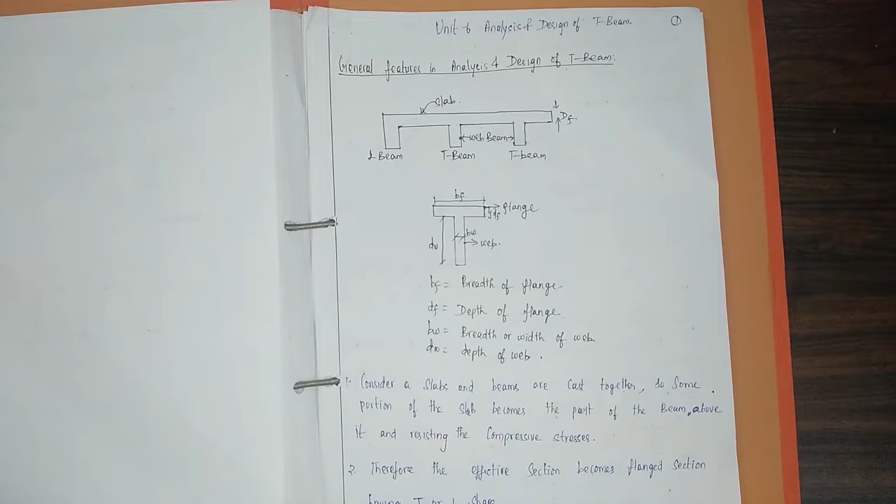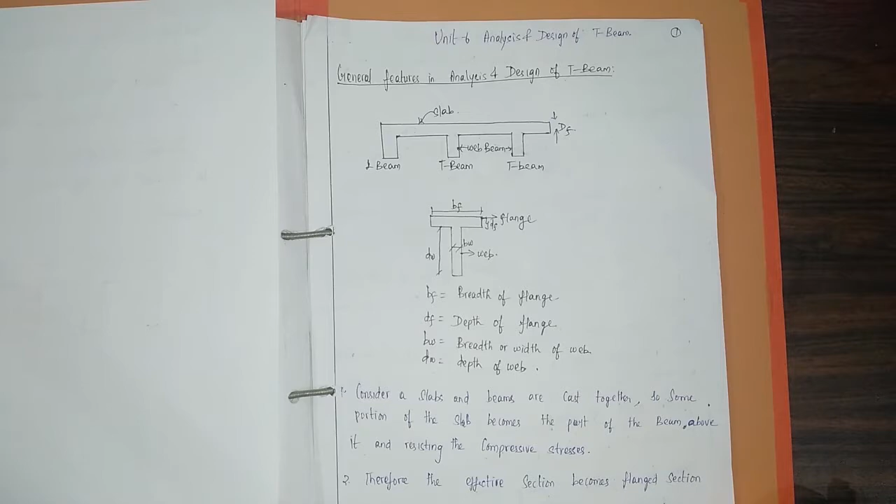In this class we are going to see a new unit about analysis and design of T-beam. This is your 6th unit in your SPT syllabus. According to your syllabus, you will have a brief introduction, then analysis part, then design part, and some simple problems to solve. Today we are going to see only the introduction part. In this lecture we cover the introduction, and in the next lecture I will teach you the analysis and design.

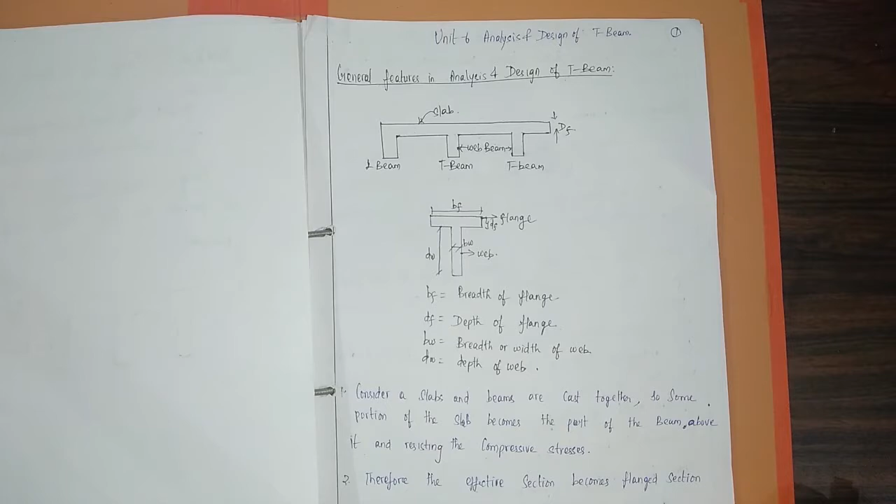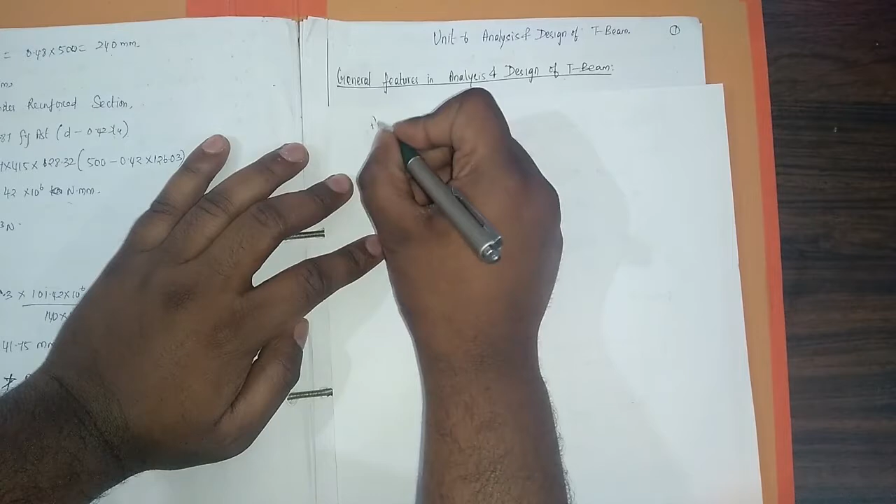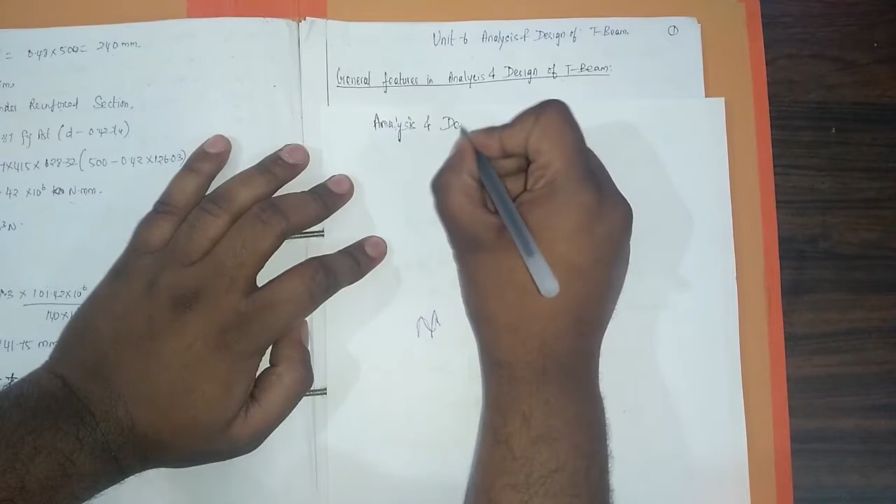So I'm going to divide this unit into two parts, so you will have a better understanding. First, what is the unit name? Analysis and design of T-beam.

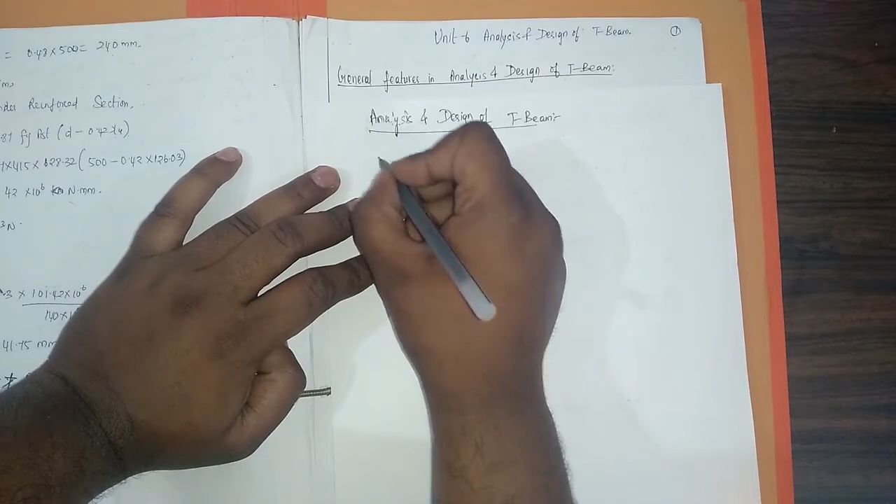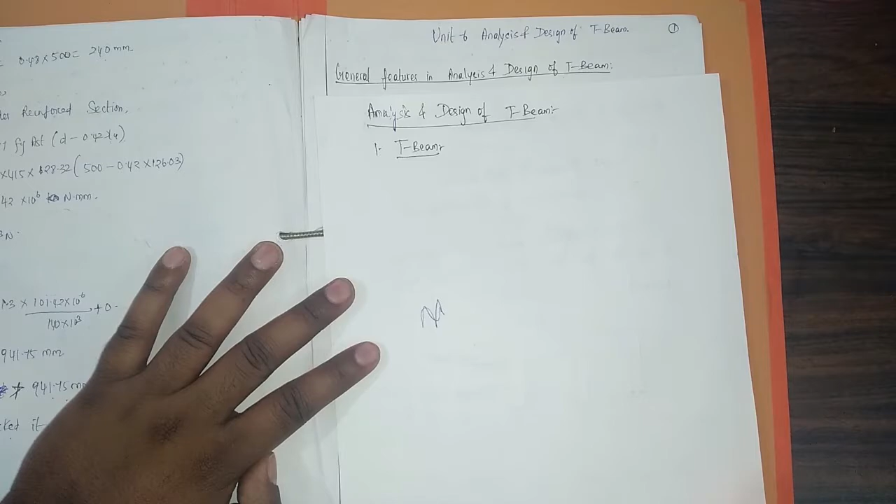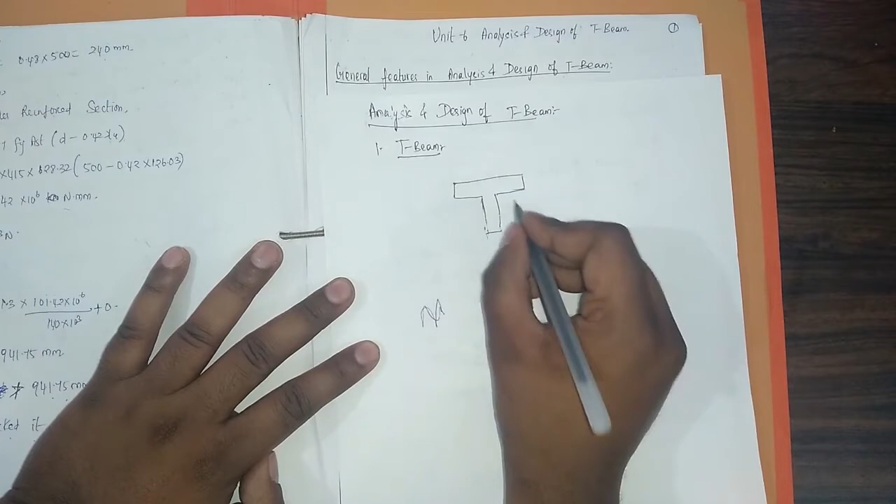First, what is T-beam? How is that beam called as T-beam? You must understand this. Due to its cross section being in the shape of T, we call it T-beam. For example, this is the T-beam. Due to its cross section being in T shape, we call it T-beam. Also, the T-beam is nothing but the beam which is cast together with the slab.

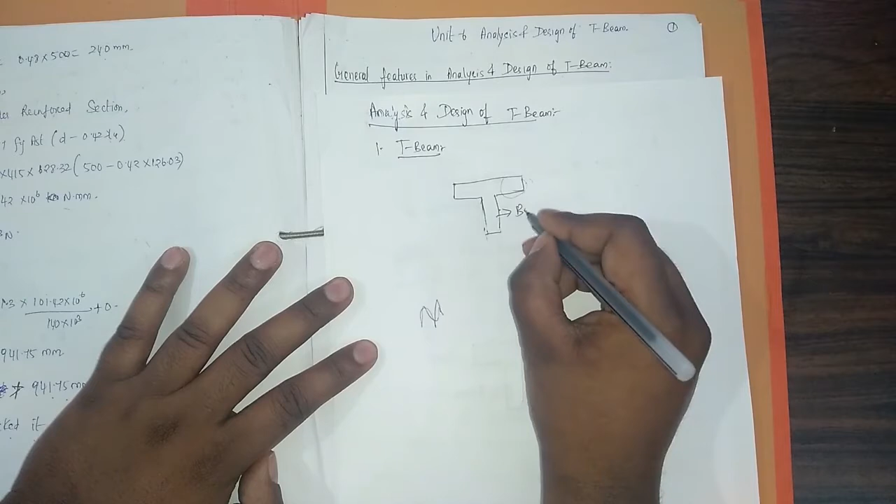In normal construction, if you see the slab casting, the roof slab casting, you can note that the slab alone is not cast. They cast it along with the beam. The beam and slab are casted together. So this is beam and this is slab, casted together, and they form a shape.

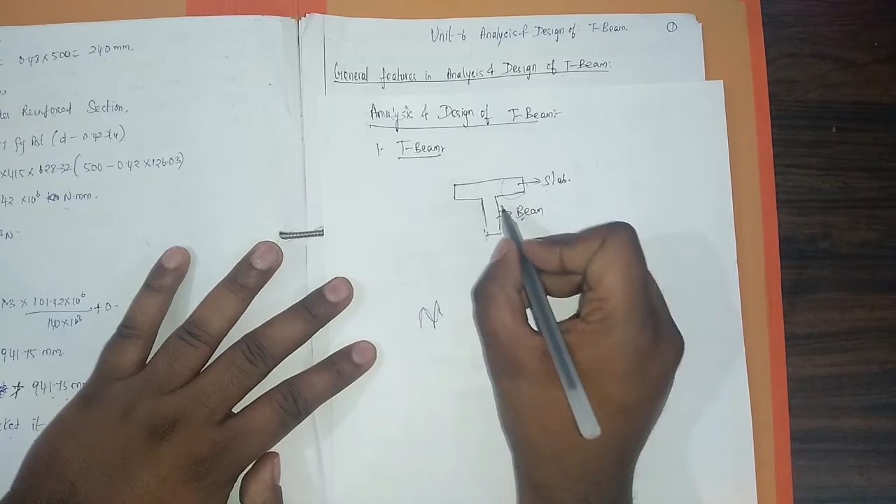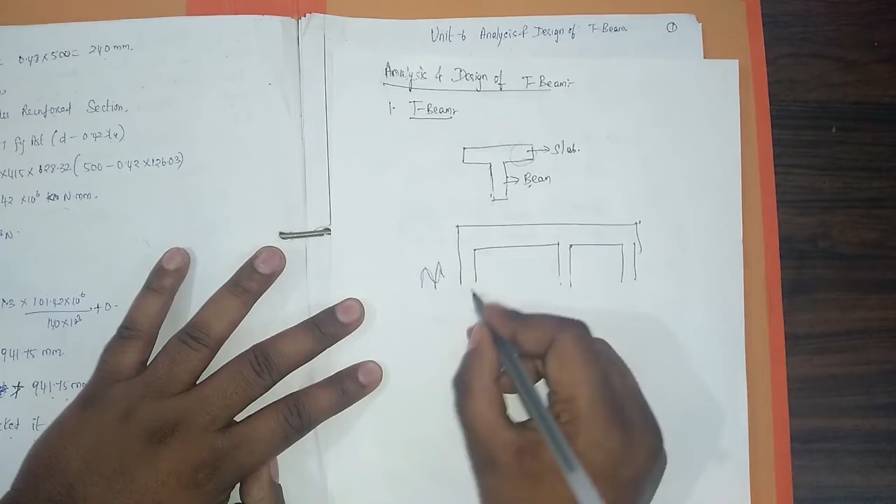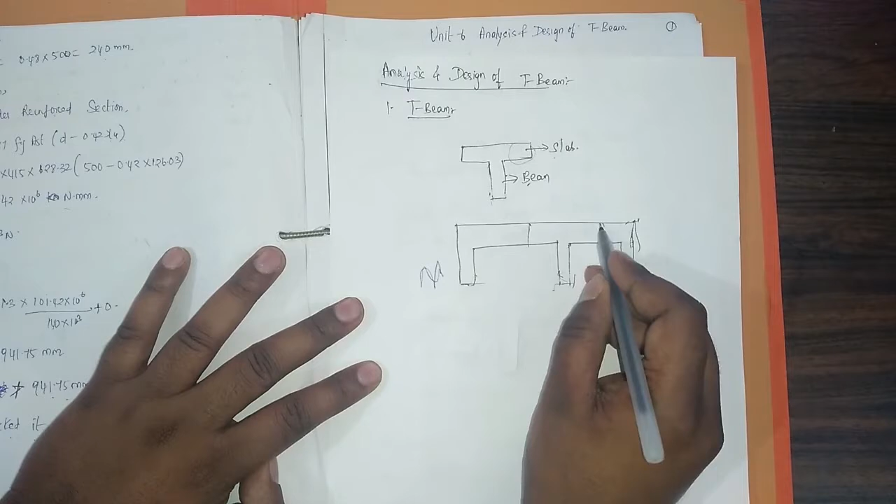For example, I am drawing another diagram. This is slab and beam. See, in this intermediate beam, this beam has slab on both sides.

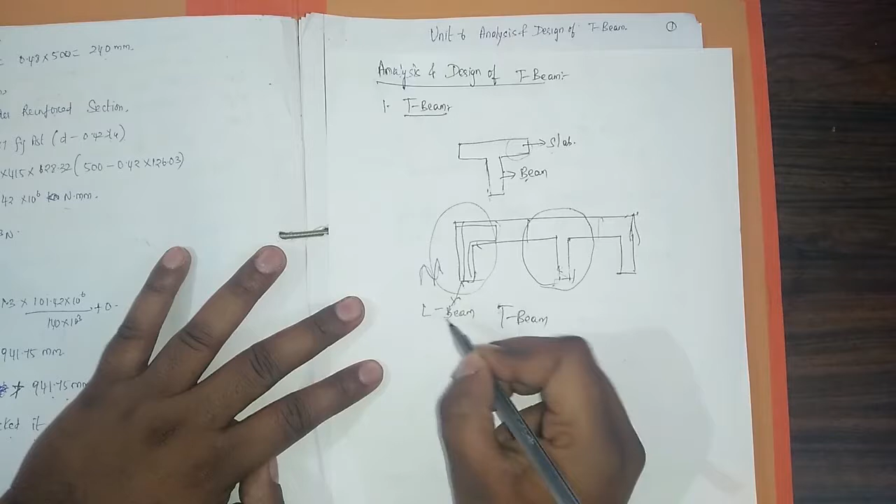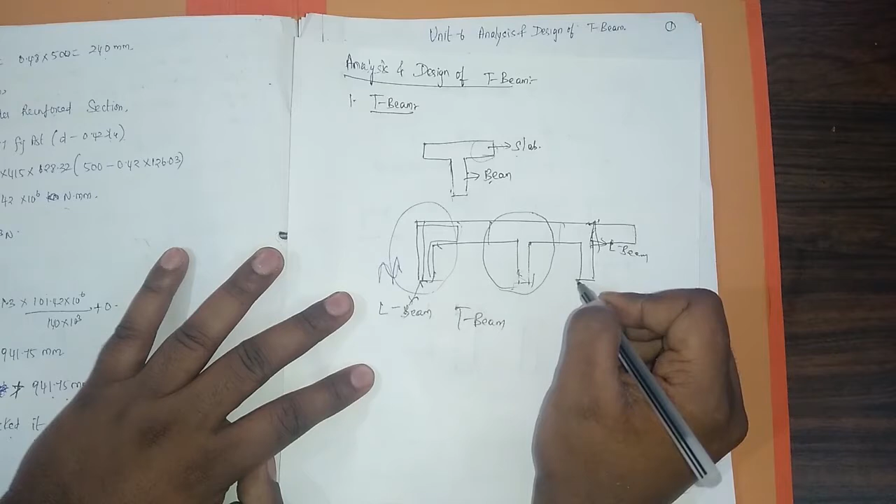So this beam is considered as T-beam. But if you see the left hand side, it doesn't have slab on both sides, it has only one side slab. So this shape is an L shape, so this beam is called L beam, and this beam is also called L beam. Suppose if the slab extends like this, then this beam is also called T-beam. You understand the concept?

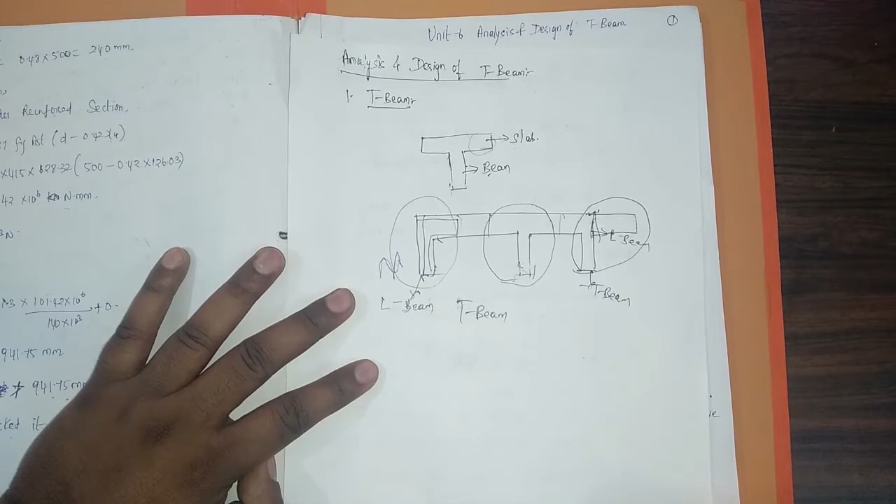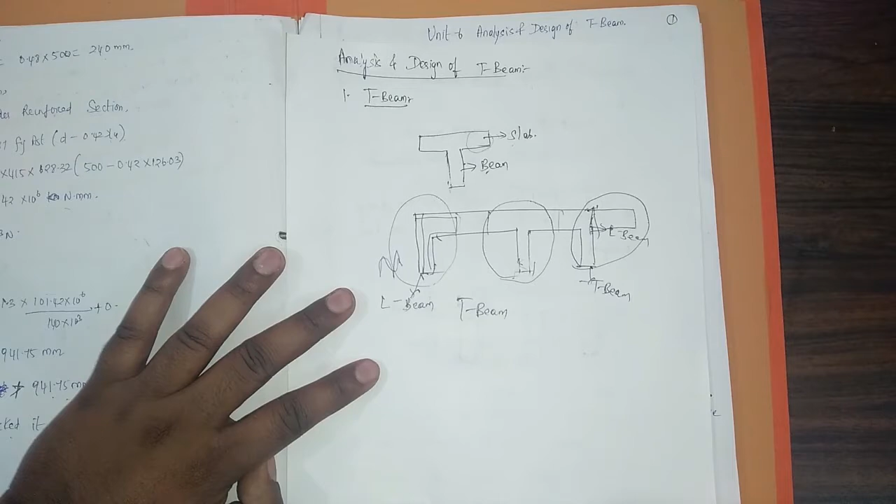So the T-beam is a load bearing structure which can be casted in any material like reinforced concrete, timber, steel, or any other component. It's a load bearing structure whose cross section is in the shape of T. Also, the T-beam is casted with both slab and beam, so it is called T-beam. So now we understand the total concept of T-beam, right?

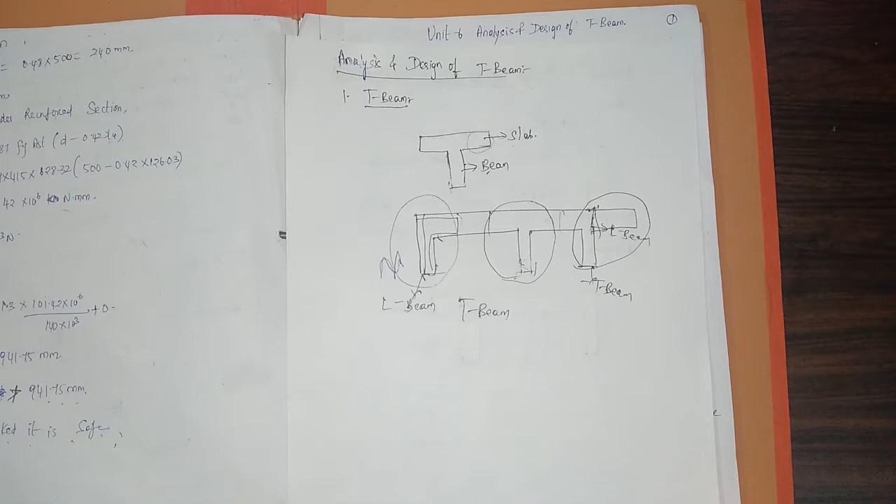Next, according to your unit, it is mentioned as analysis and design of T-beam, that is your subject, right? Design of structures, you have to design the structure. Design means if you are the engineer and you are going to place a structure in a particular area, you are going to design what is the height of the structure, what is the breadth of the structure, what is the thickness of the structure, that is the volume, the 3D.

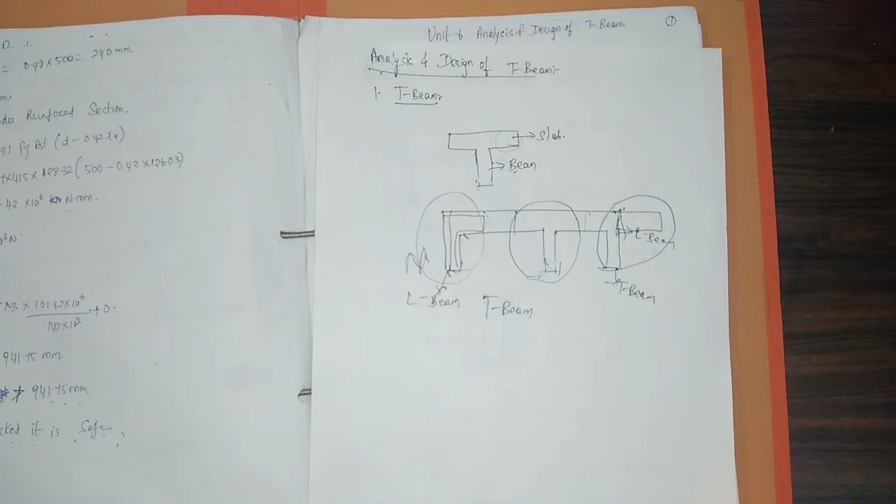That is only called as structure. So you are going to design what is the depth of the structure, how the structure should look, its architectural view, how the external view should be, how the internal view should be.

You are the engineer, you must want to design. The engineer must design each and every component of a building. Beam is a component, column is a component, slab is a component, stairs is a component, water tank, brick wall, door - everything is a component in a building. Combining all these components together is only a structure, a building.

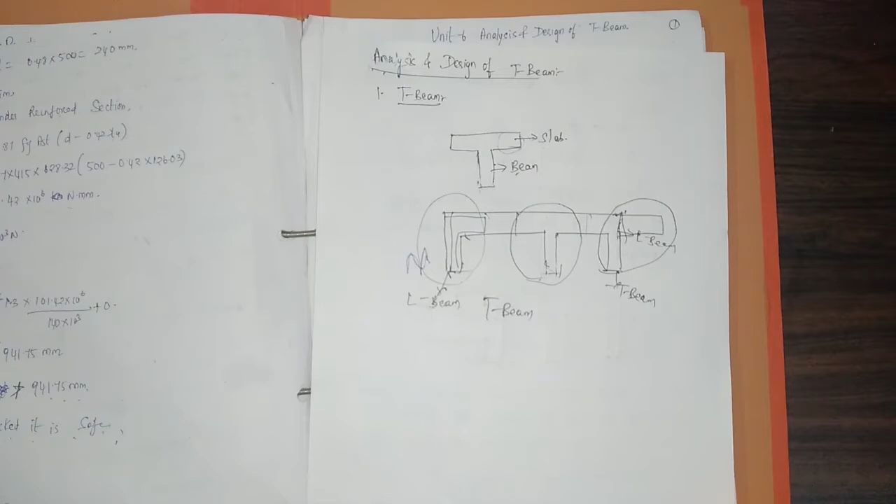Likewise, T-beam is also a component. So the work of a civil engineer is to design every part, to design every part.

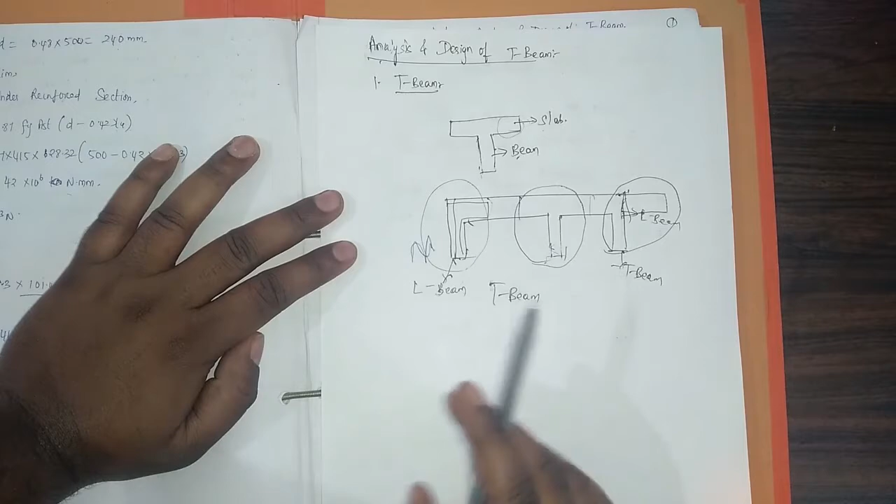So I will briefly explain what is analysis. Analysis is nothing but you are going to analyze how much load is going to act on a structure. What is that load that is going to act on a structure?

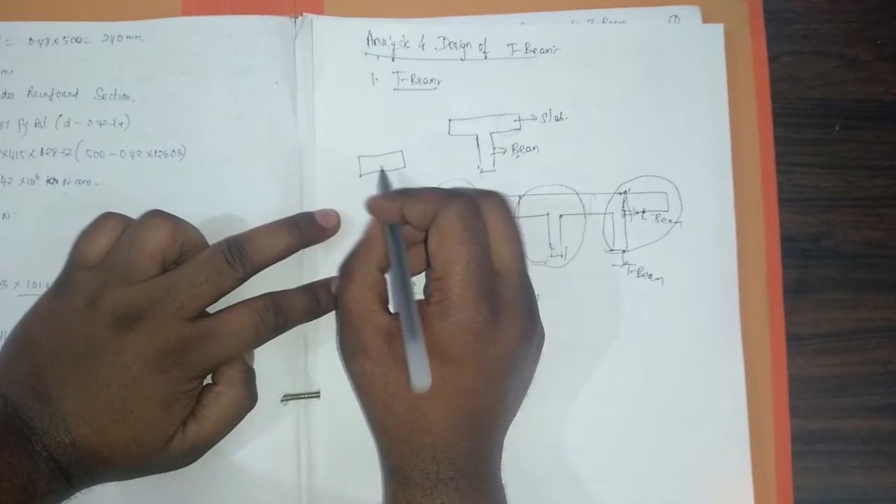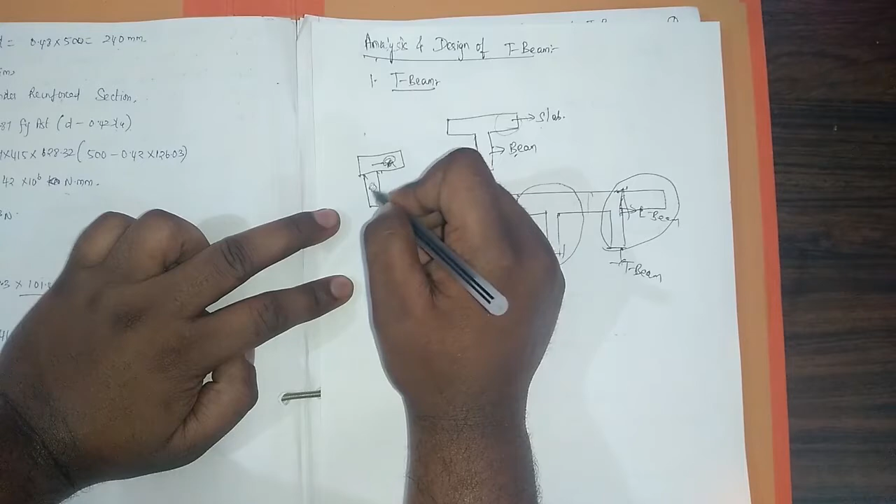A structure is used for carrying loads. For example, this is a beam, this is slab, and a beam is there. So over the beam in future, there may be some loads that act. It has some self-weight, and some live loads may act - UDL, point load may act. Due to that load, there will be some shear force and bending moment acting on the structure. So the structure should withstand the load, then only it will not fail.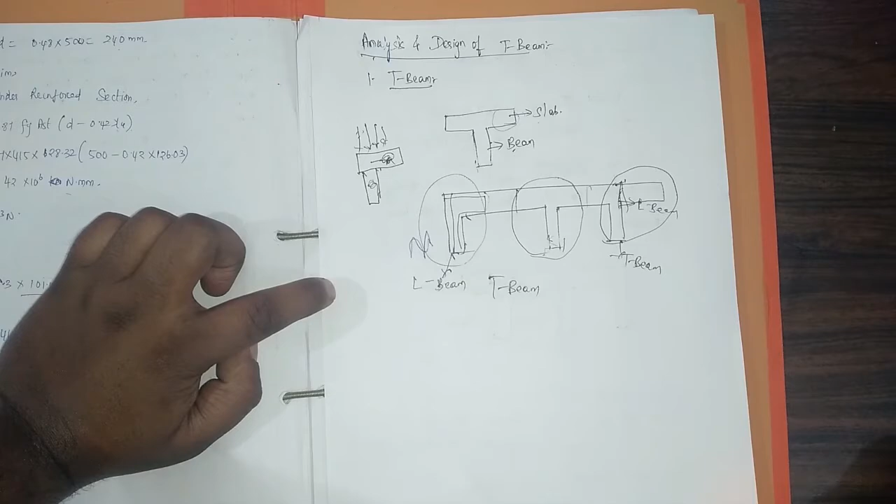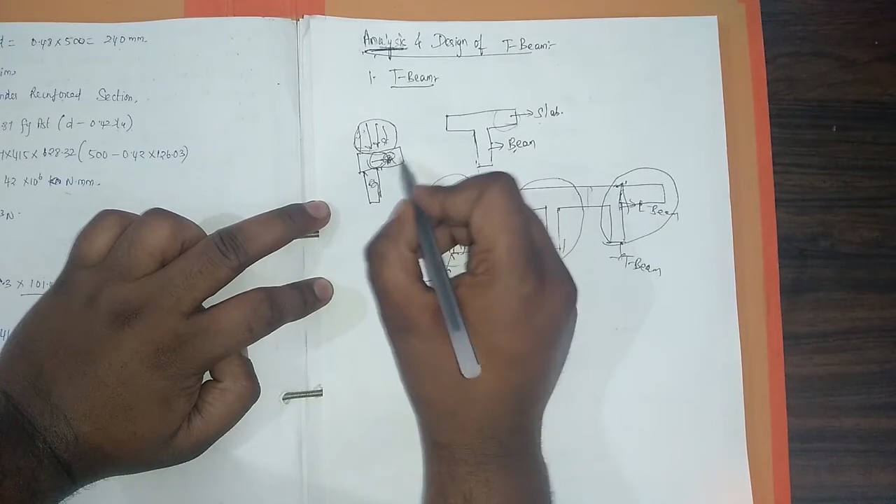So the work of a civil engineer in the analysis part is he must analyze how much load is going to act on the structure and what is the self load of the structure. Due to this combination of all loads, how my soil is going to withhold the structure and how my structure will not collapse. This is the analysis part.

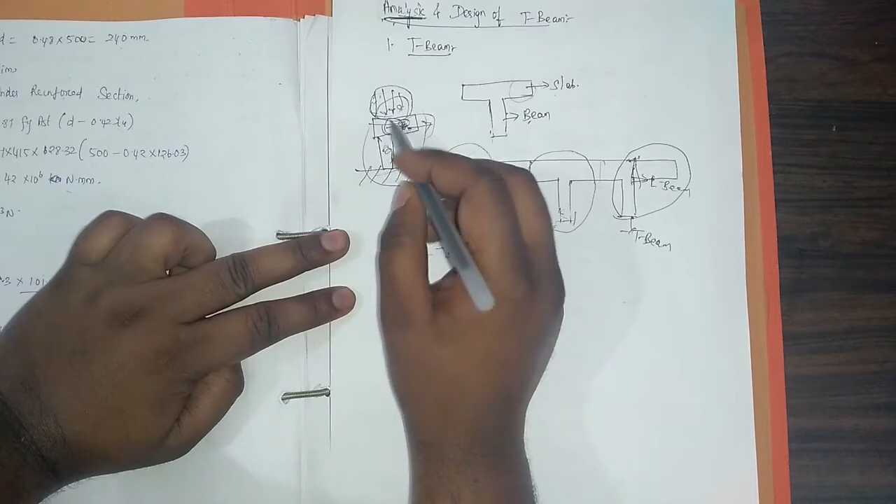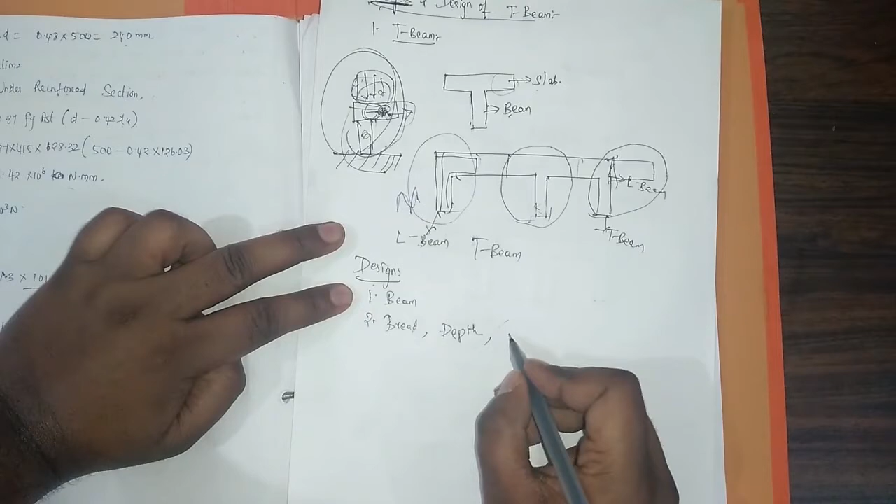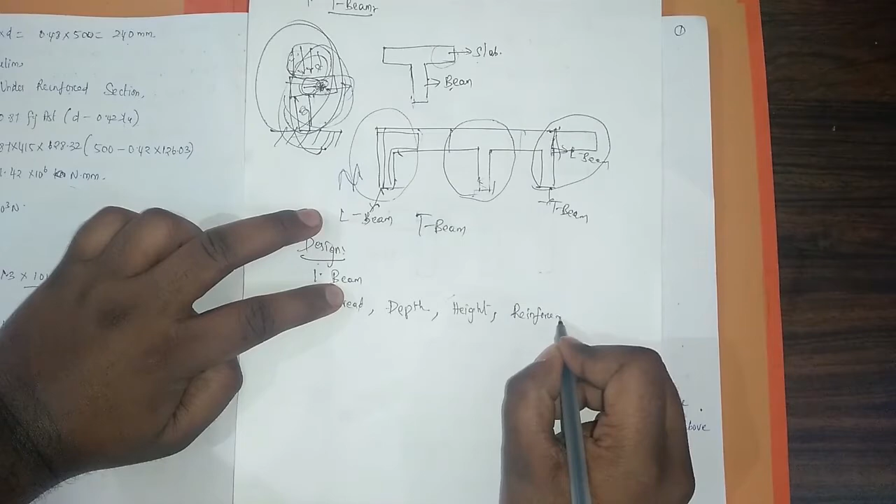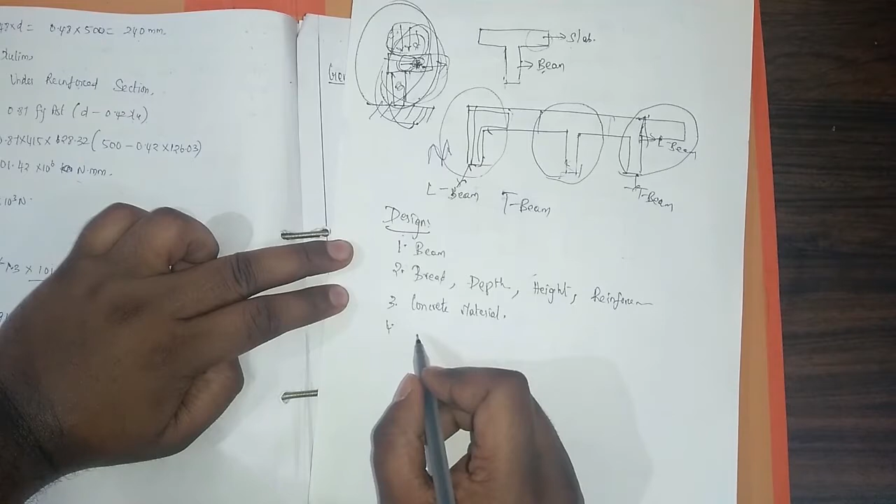And in the design part, according to this load, what type of beam I am going to provide, what is the breadth of the structure, what is the depth of the structure, and what is the height of the structure - you are going to design what the height should become. According to this load, what type of reinforcement bar you are going to use, what type of concrete materials you are going to use, and what is the height of the structure. According to the height, what are the pressures.

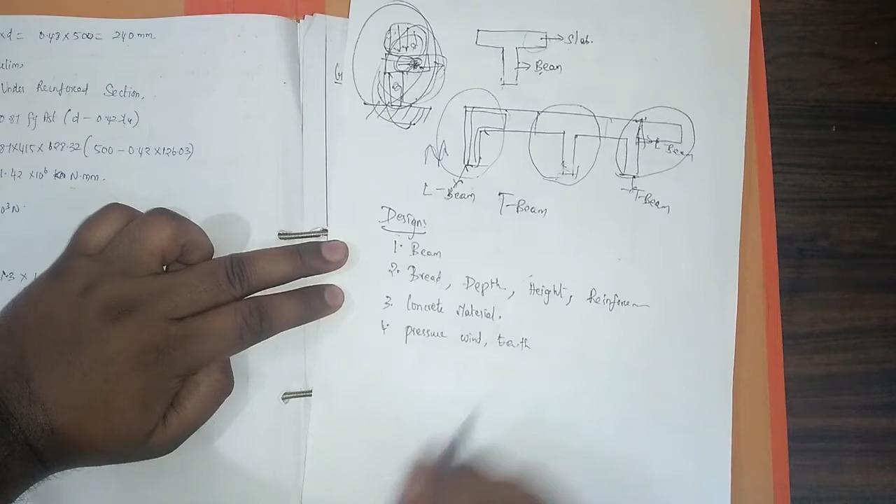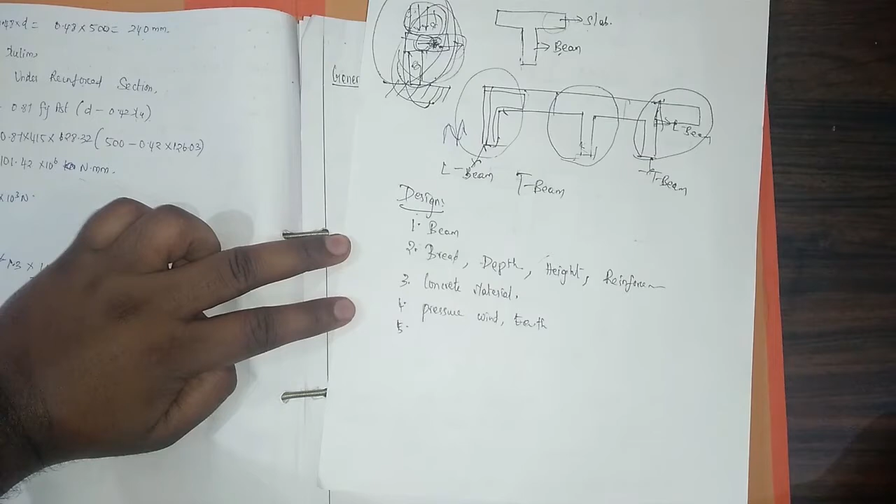Pressures means wind loads, earthquake loads. These are sometimes some pressures. So what are the pressures that are going to come - these are the analysis part. So according to that, you will design the structure - how much reinforcement bar you are going to provide, what are the materials you are going to provide, what is the breadth, depth and thickness of the structure.

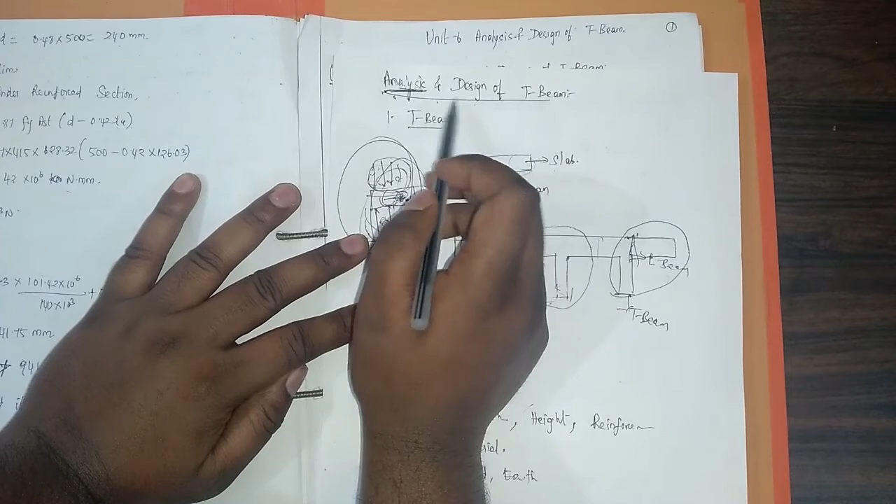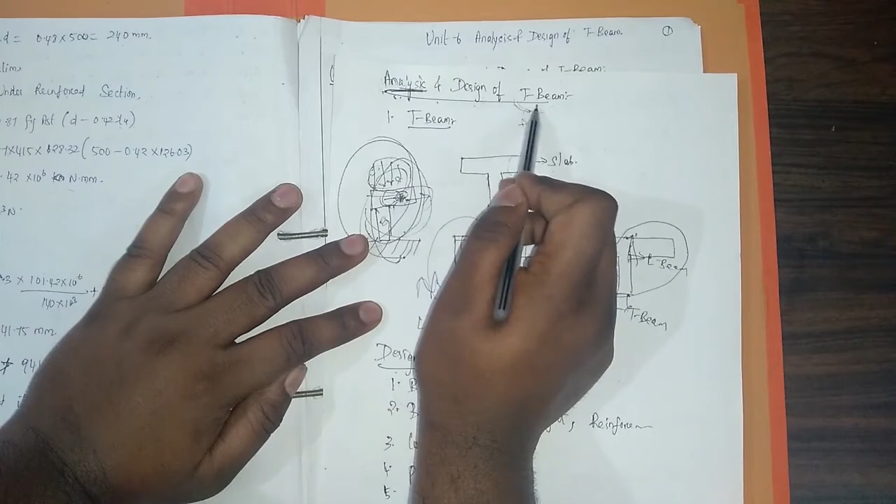That is the part. So in this unit, the introduction is analysis and design of T-beam. First you must analyze what is the load that is going to happen in the T-beam, and you must design the T-beam - what are the reinforcement bars, what is the depth of the T-beam, breadth of the T-beam, what is the effective cover that you are going to provide for the T-beam. So this all comes under T-beam section.

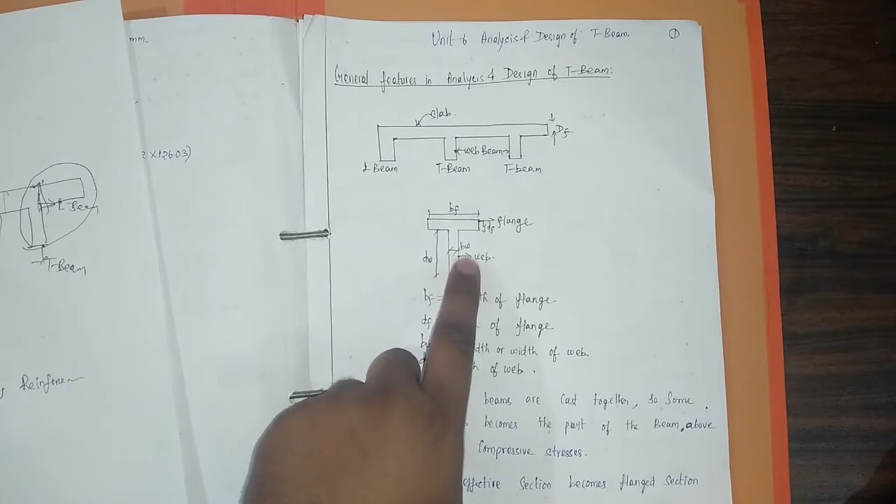Okay, so I will show you. See, this is the T beam, as I already drew the T-beam. So this top portion above the beam, this horizontal part, is called the flange. And this beam below the slab, this part is called the web. This is called flange, this is called web.

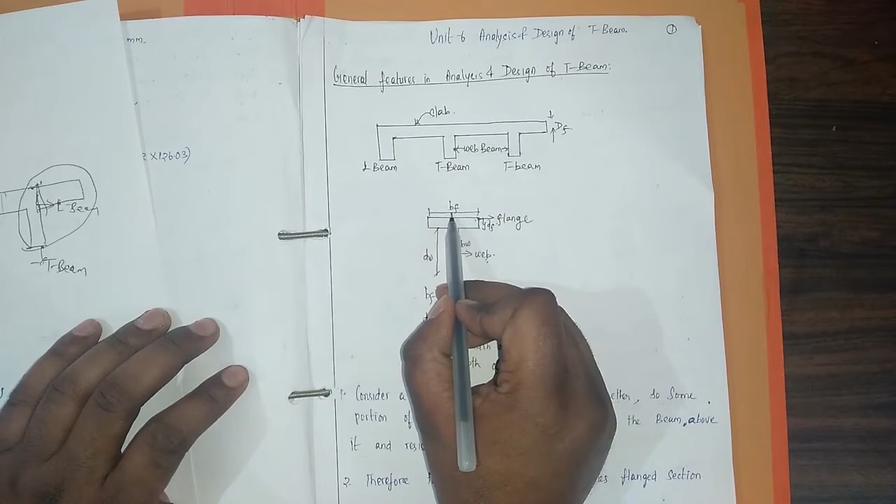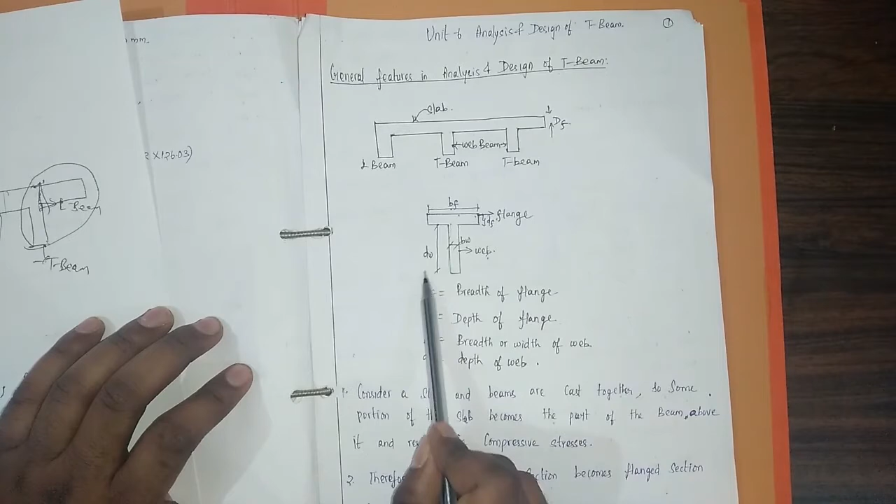And the distance from here to here, in the flange portion, is denoted as BF. That is nothing but BF equals breadth of the flange, and DF is depth of the flange, DW - from here to here - is depth of the web, and this thickness is breadth of the web.

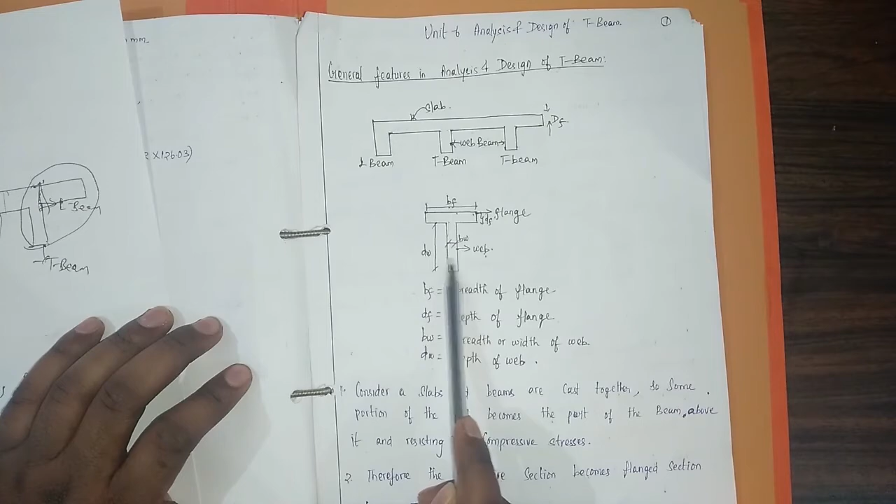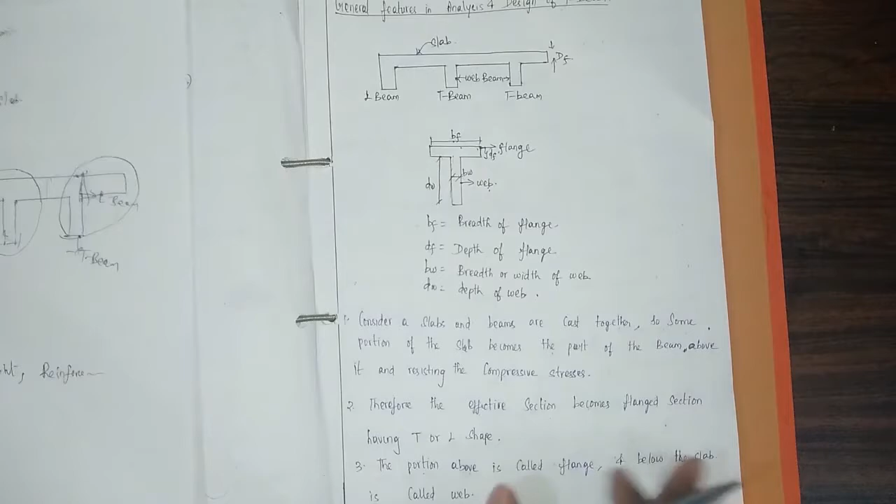That's the small introduction. So the portion above the T-beam is called the flange, and the portion below is called the web. Okay.

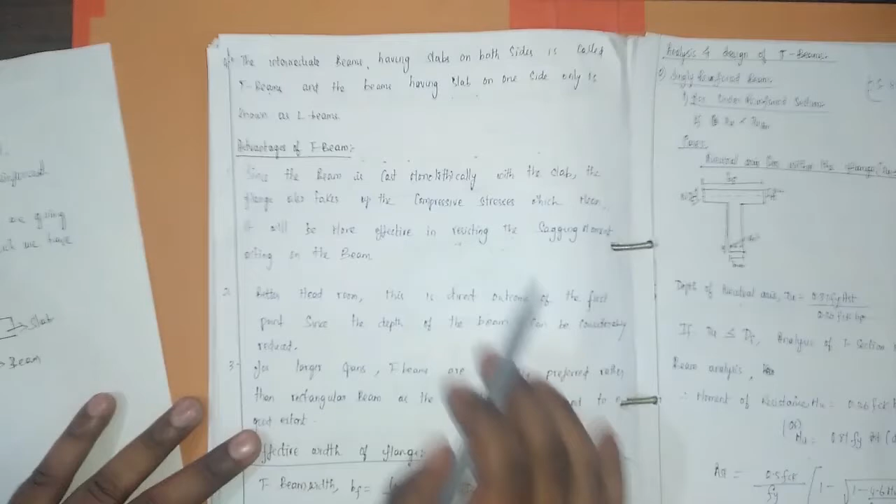So next we are going to see the advantages of T-beams. It is very simple. Since the beam is cast monolithically with a slab, the flange also takes up the compressive stress, which means it will be more effective in resisting the sagging moment acting on the beam.

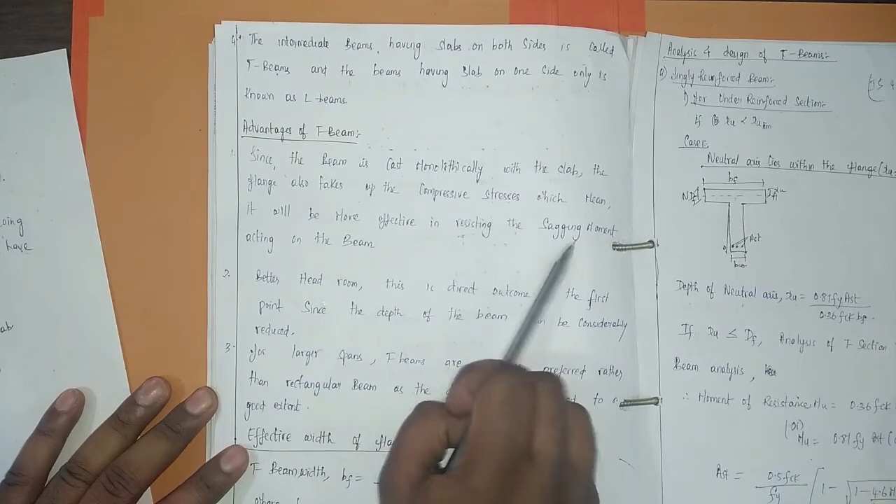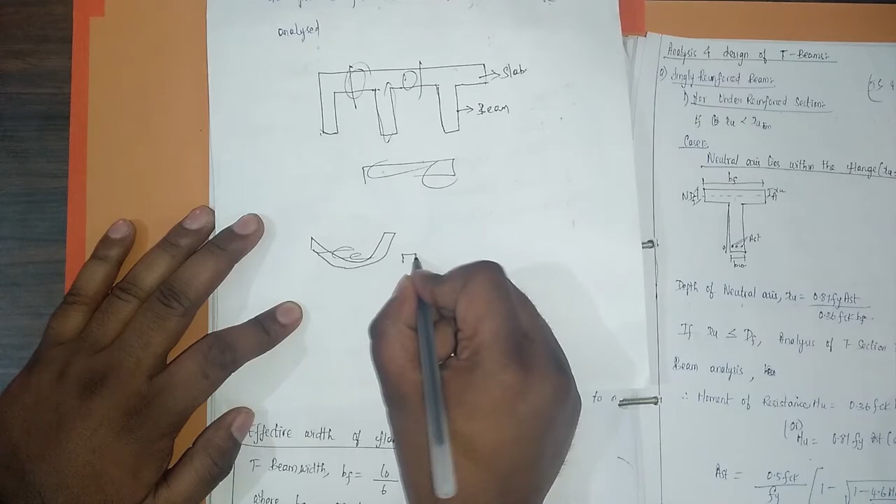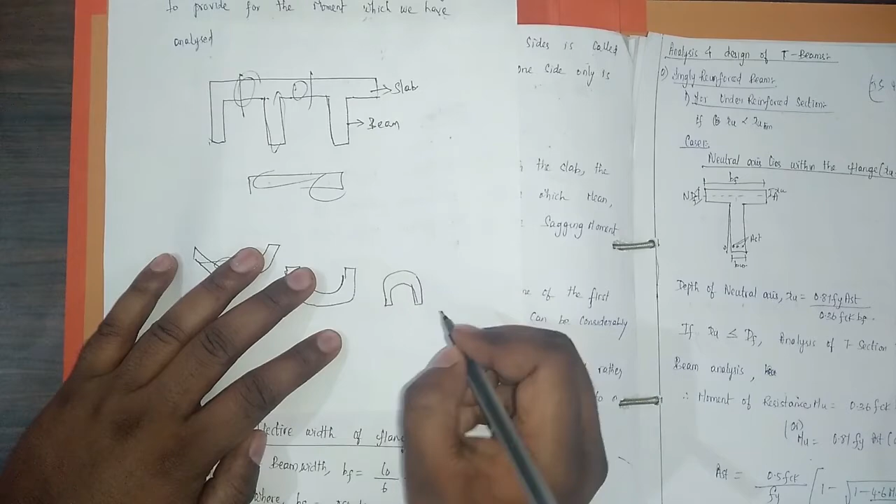What is sagging moment? There are two types of moment: positive bending moment is called sagging bending moment, and negative bending moment is called hogging. Sagging bending moment is the bending which occurs in a concave manner - the beam is bent in a concave manner. Hogging bending moment is when the beam is bent in a convex manner.

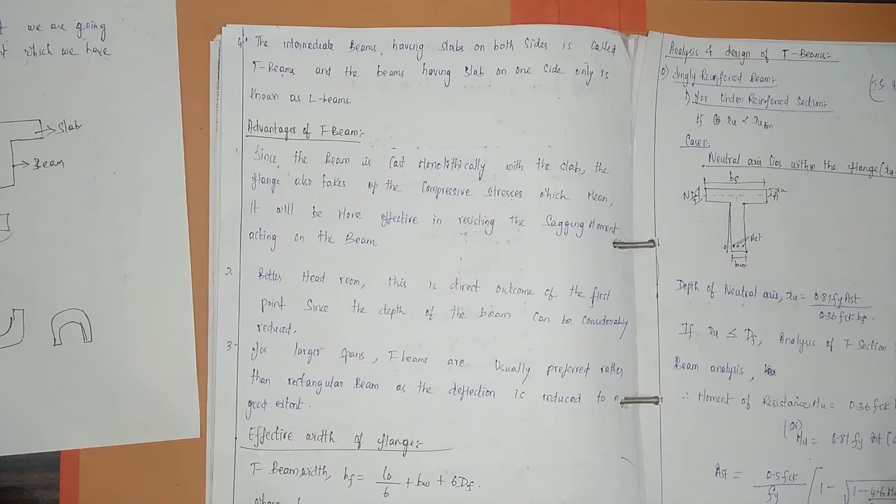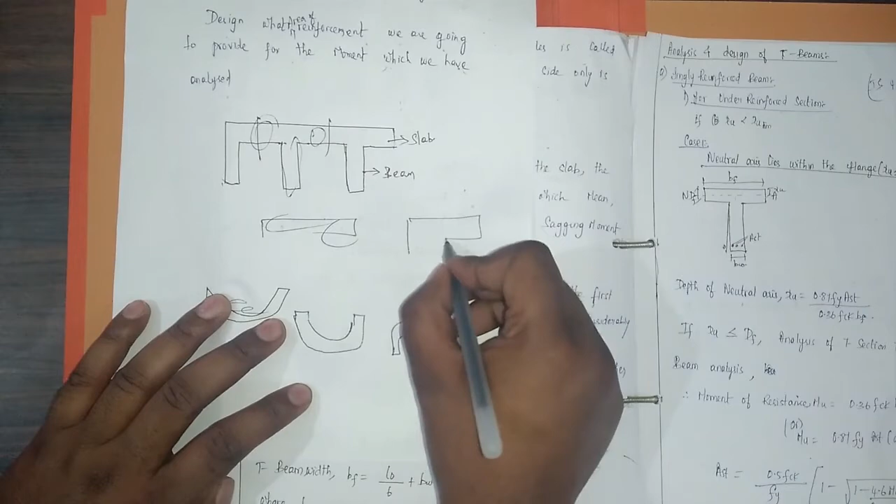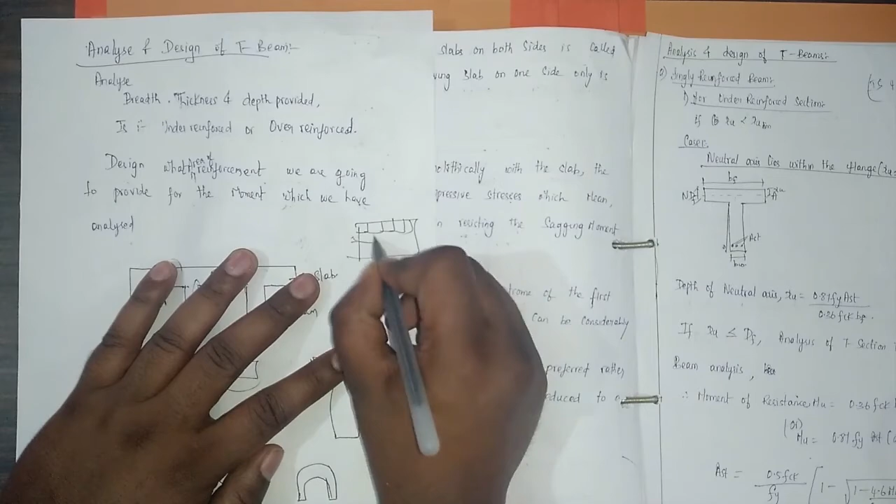So the first advantage is that the T-beam is more effective in resisting the sagging moment acting on the beam, because the beam is cast monolithically. What is monolithically? Monolithically is nothing but a large structure which doesn't contain any parts. For example, take a wall - it comprises small bricks, small bricks forming a wall.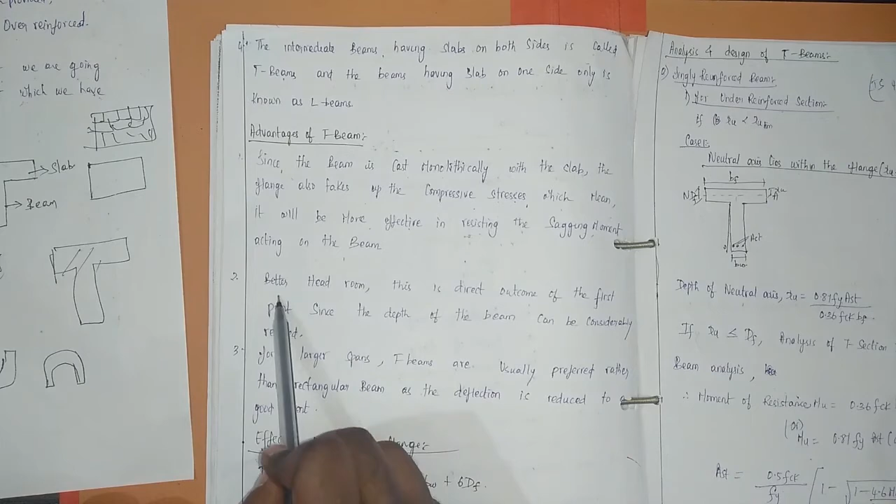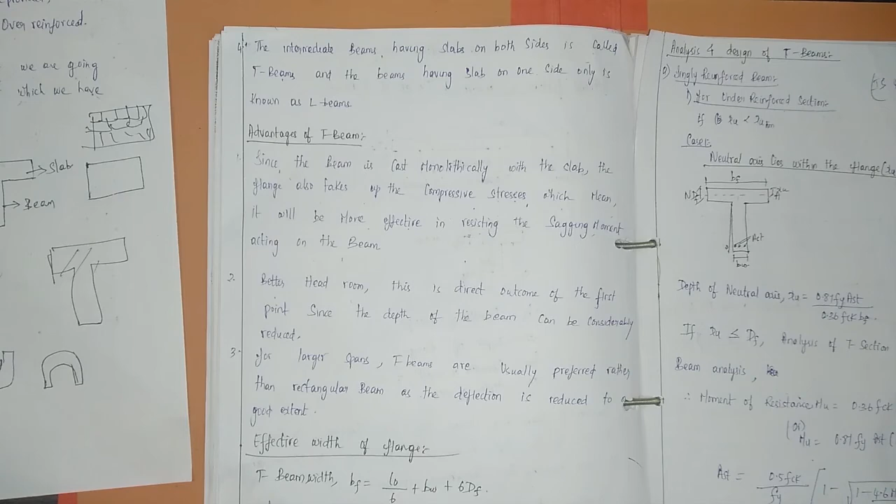First point done. Second one: better headroom. This is a direct outcome of the first point, since the depth of the beam can be considerably reduced. In a normal beam, if you cast for a heavier structure where the height of the structure is very high, the normal beam depth will be more. But if you take the T-beam, it will make your beam lesser in depth. So since the depth of the beam can be considerably reduced, there will be better headroom - headroom means the distance between our height and the slab will be better.

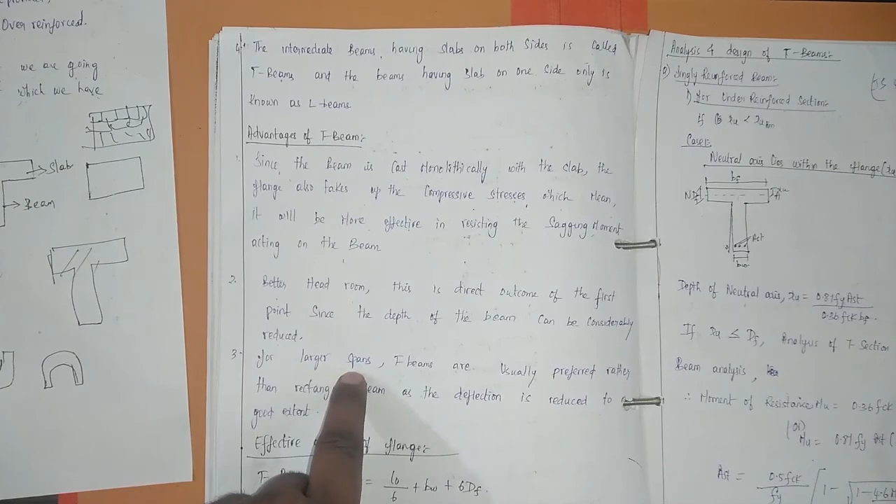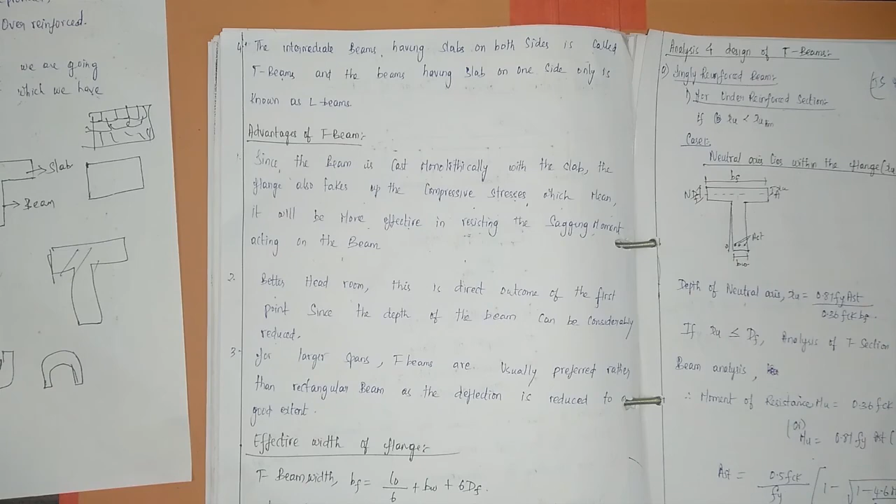Third one: for longer spans, T-beams are usually preferred over rectangular beams. For longer spans, like if you are going to construct a structure which doesn't have columns in between the room - for longer spans where the support between beams is very long, in that case you can go for T-beams. So T-beams are preferred over rectangular beams.

So only three advantages: since the beam is monolithic, it is effective in sagging bending moment, and the depth of the beam is reduced in T-beams, so we will have better headroom. And for larger span rooms, T-beams are preferred over rectangular beams.

Okay, so I hope you understand the introduction of Unit 6. This is part 1 of Unit 6. In part 2, we will see the analysis and design of T-beams. Thank you, students.